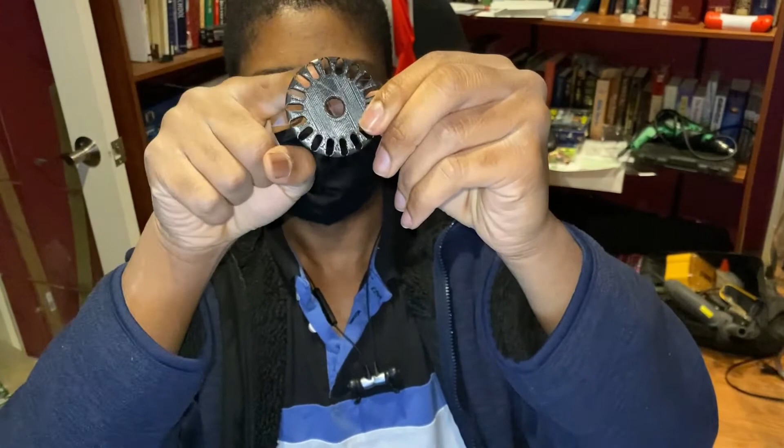And whenever the light passes through one of the holes on the wheel, this is just an example wheel I have, I don't know if you guys can see that, but whenever light would pass through one of the holes, it would increment the value. I'll explain it more in depth when I bring you guys over to the computer screen, but that's the basic idea. That way you can see the position and the velocity of the motor as the motor spins.

And the velocity is just by how long it took for it to pass its original point, because it's done a full rotation by then. So that could be used for conveyor belts or whatever. That way you know exactly where the part is on the line, and you can do some feedback control, because that's the main purpose of it, feedback control systems.

That way you can do some feedback control to actually adjust the belt or the robot, or whatever else you put it on, based on the position that it sees. It knows that it overshot a little bit: oh, wait a second, it's supposed to be 12.2 degrees right now. Mine's not gonna be that good of a resolution, but that's the idea. It's supposed to be 12.2 degrees, but it's 12.8. Let me bring it back to 12.2 real quick. So you use the feedback control, that way it knows it needs to go back and fix it. So that's the general idea.

So I'm going to bring you guys over to the computer screen, show you a little bit of pictures, that way you get a better idea of what I'm talking about. And I'm going to show you what I have drawn up in CAD right now. I'm going to code it using Arduino, 3D print it. We'll get into the whole shebang. So see you guys over in the computer. Let's get it.

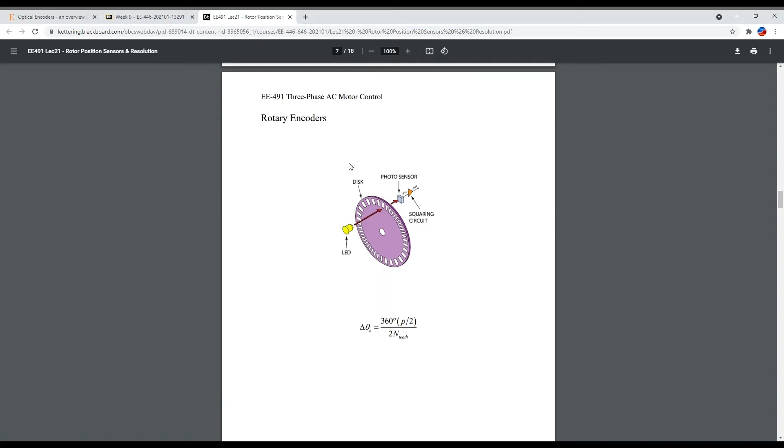Why not? And the thing about quadrature encoders is that you're actually able to tell whether it's going clockwise or counterclockwise, because with just the normal one, all it knows is the amount of degrees. It doesn't know if it's negative or positive degrees, or clockwise or counterclockwise. It just knows, okay, it's been this many degrees. If you went forward and then backwards, it would still increment up because it doesn't know what direction it went. So that's what this is for.

So by having two wheels here, by knowing which series of slots it went through first, the outer or the inner, it can tell whether it's going forward or backwards. So if it goes through the outer one first and then the inner one, it knows that's clockwise, I think, and vice versa for counterclockwise because they're offset. So that's the basic idea of how it works.

So let me bring you into the CAD model I drew for the encoder that I'm going to attempt to build, because the concept, at least to me, doesn't seem that complicated, but it took me a while to do the CAD actually, because, well, you'll see. It doesn't seem that complicated in theory, but I'm a little worried that it won't work.

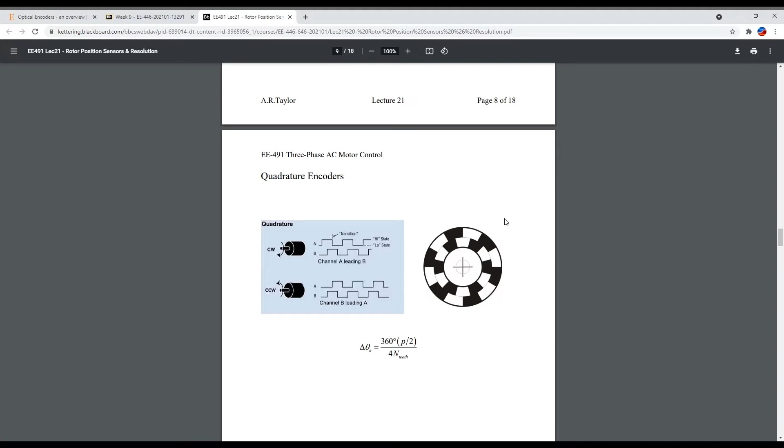But whether it does or doesn't work, guys, we're going to have fun with it. Isn't that what this is all about? We're going to have fun and we're going to learn. I'm sure you've already learned so much just by my amazing explanation.

But let's head on over to the CAD.

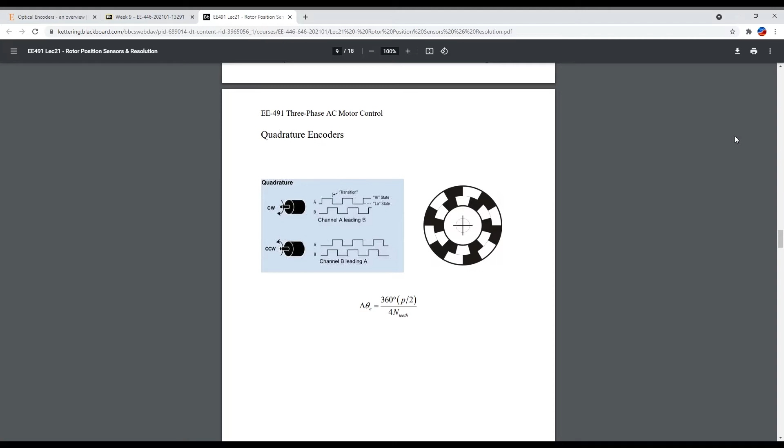I'm not actually going to be using this for any feedback control system to actually adjust the motor based on the whatever and all that crap, which is what you would actually use it for. Right now, I'm just trying to make one that will properly display the degrees. Sending the data over to the motor to get it to actually change based on the amount of degrees that it's going and whether or not you want it to go that far, et cetera, feedback control systems, that's like another video. You feel me?

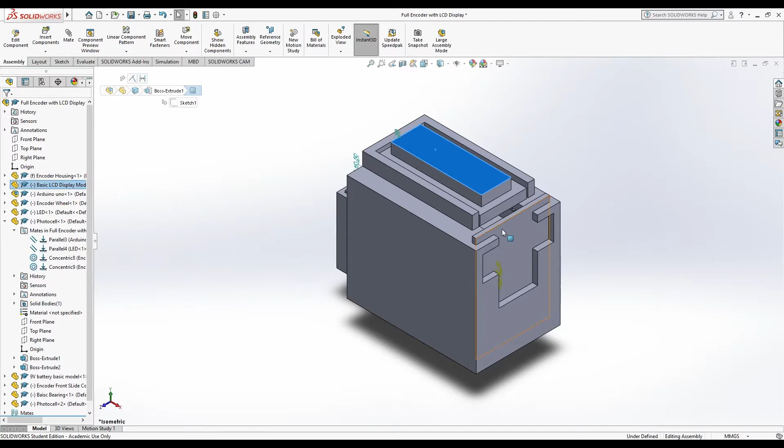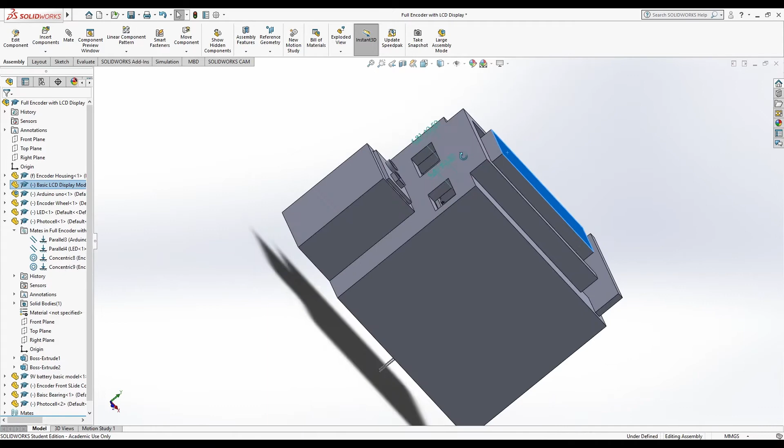So LCD display on top, and I have it just enclosed on all sides. Actually, this goes a little bit higher. That way it won't fall out, right? The only way it could fall out is if you tilted the entire thing upside down. Actually, that might be, it's fine. I don't know if I want to actually make it so that it can't fall out by tilting it upside down. Nah, I'm not too worried about it, because it's going to be attached through wires to the stuff in here. So, eh. Plus, let me see, I actually have it over here. No, I don't really want to glue this thing to it. But that's the LCD display.

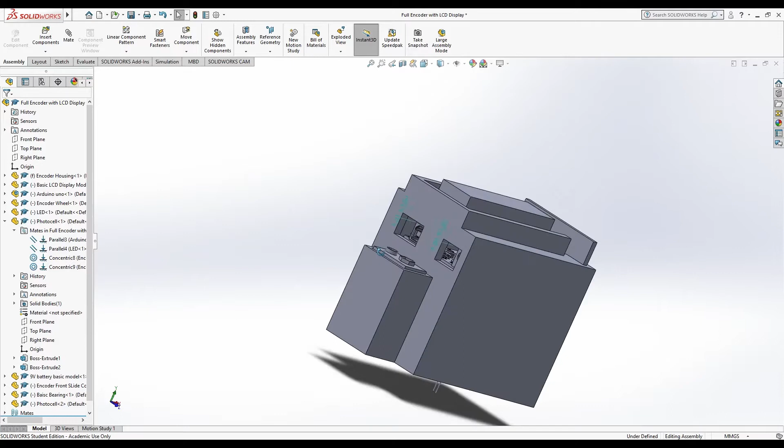And then back here, you can actually see in there a little bit, I got the ports and everything. But back here, I have a battery slot. Oh, that's already fully constrained. But the battery slides in there. It's just a 9-volt battery that should be able to power up everything in regards to the encoder itself. I'd probably use a different battery for the motor, but the motor is completely separate. You slide the motor into the bottom here. So 9-volt battery, so it can connect to the Arduino, which is inside of here.

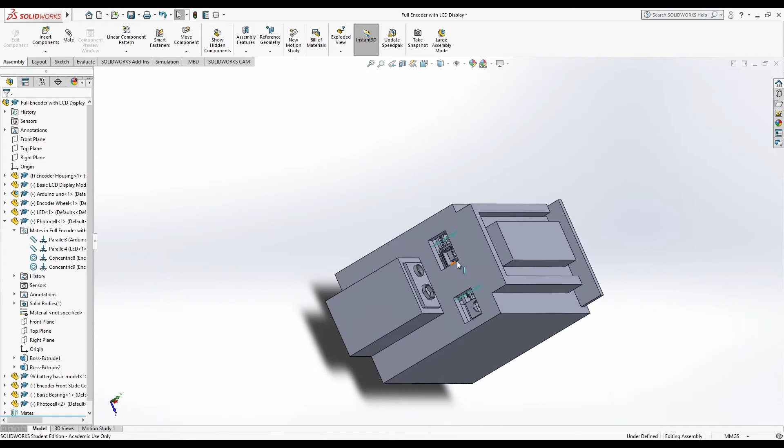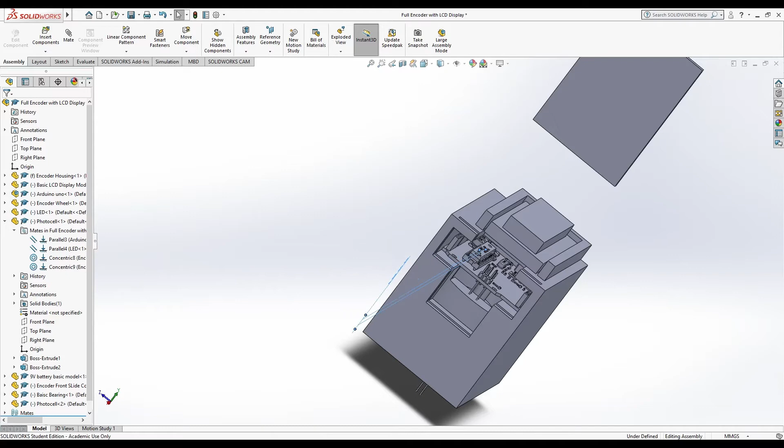And this thing actually slides up right now, because this is how you close everything in. So you can actually slide that right in there. So then wires are going to come from, you see I have a little knockout here. So wires are going to come from this part of the LCD display and go into the Arduino. That way it will actually display the values on the LCD display. And then the Arduino is in here. Whoa, that's a dimension. The Arduino's in here. So as you can see, I created just a spot where you can literally just slide the Arduino in and out.

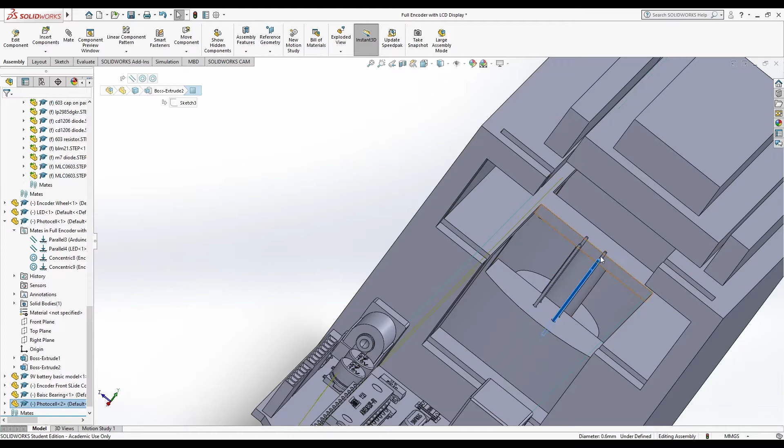And I just kind of have, these are wire leads right here. Yeah, we'll get there in a second. These four little things shooting up, and then this right here. So this entire little H bridge thing is for the Arduino to sit on. So the Arduino sits on this in there, and then it can bring wires down from all the pins over here down into this area over here. Wait, it's starting to get a little messy the way I'm angling this.

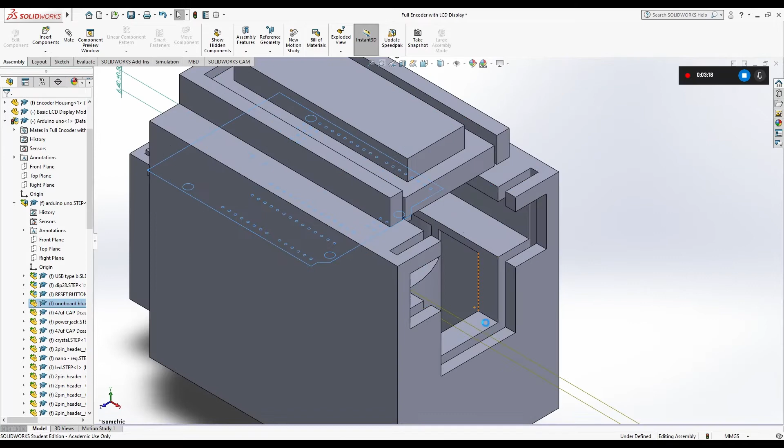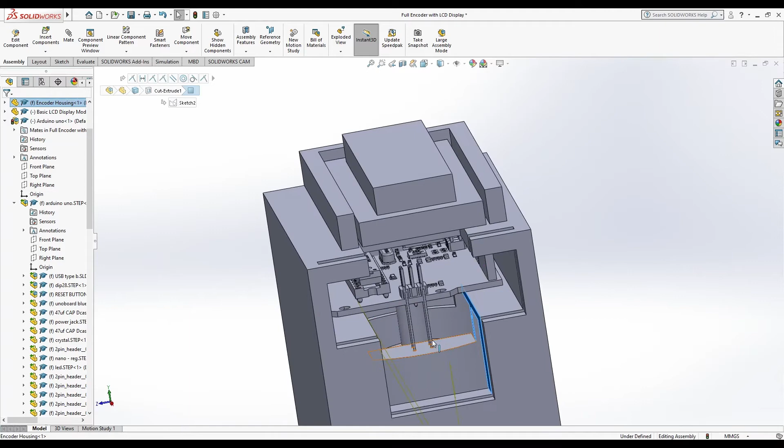But the pins from the Arduino can go down to these leads over here, right? So you can bring the leads in, or actually these are analog, so they go over here, I think. But you can bring the leads over here through this. Again, I have another knockout slot right here. I have this slot right here where it's knocked out from this tube I have down the center. That way you can bring the leads over to the Arduino. And let's see, what else?

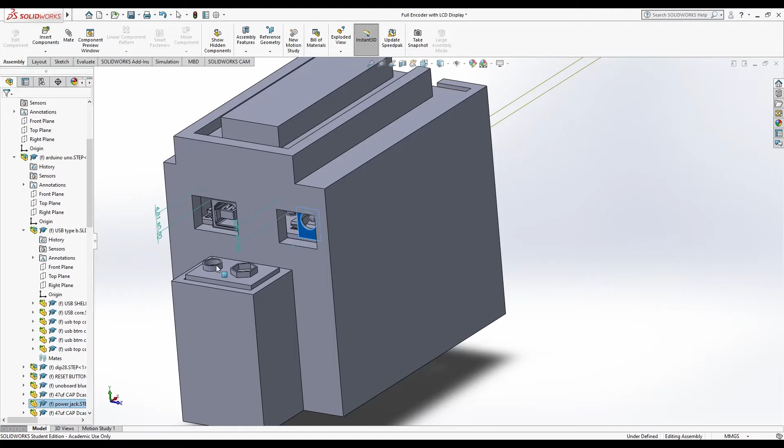And by the way, this is just the ports for the Arduino right here that you kind of saw on the other side that I have knocked out. Oh, I brought that forward a little bit too far. Yeah, about there. Know how I made these holes bigger than they need to be? It's because it didn't really matter, and I was like, yeah, that's good. Give myself some wiggle room. That's not really a critical dimension. But then down here at the bottom, we have our wheel. So let me slide that out actually.

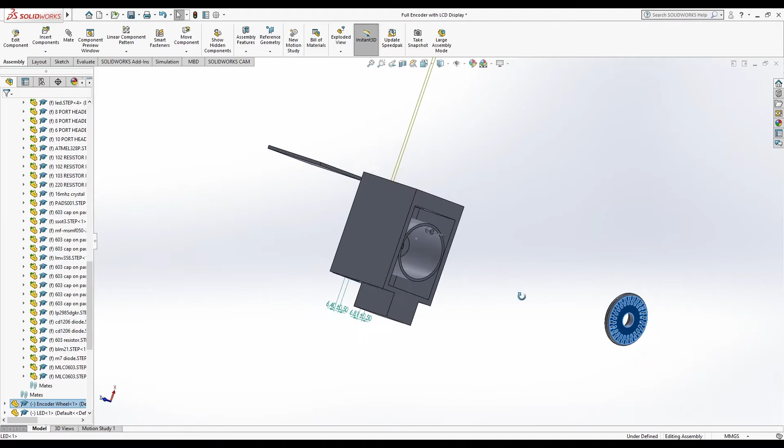Might be a little too far, but there we go. Let me slide that out. So as you can see with our wheel, it has two sets of rings in here for the slots. That's just like in the picture you saw. It has two rings in here. So it's got the outer ring and the inner ring, and by knowing which one it passed through first, it'll be able to tell if it's going clockwise or counterclockwise. You get it.

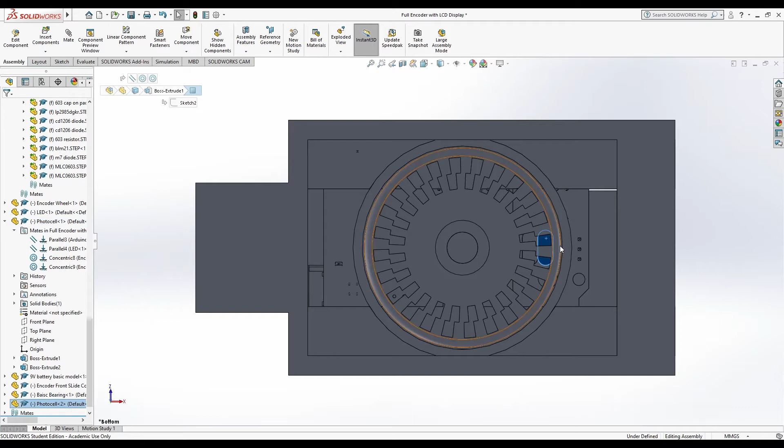And over here, these two things right here are the photocells. As you can see, they're actually a little wide, but they're just barely not too wide, probably. Because like I said, there is a threshold value that I'm going to figure out, and depending on that threshold value, we'll just say whether it's high or low. So when the slot is centered, you see the other ends of the photocell are mostly blocked off by the dead zones in between.

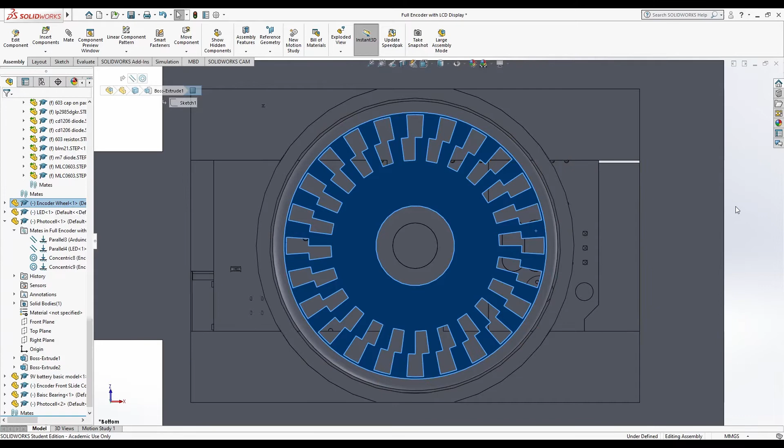So as long as I make sure to say, okay, this threshold value is when it's blocked off on the two sides like that and you're just seeing the center, the threshold value is, I don't know, 155 out of 255 or whatever it's going to be, and that means it's high. So this should work fine. If it was any bigger than that, I might run into issues. And then obviously you have the other one right here. These are aligned with each other, the two photocells, and then the LED would be here as well.

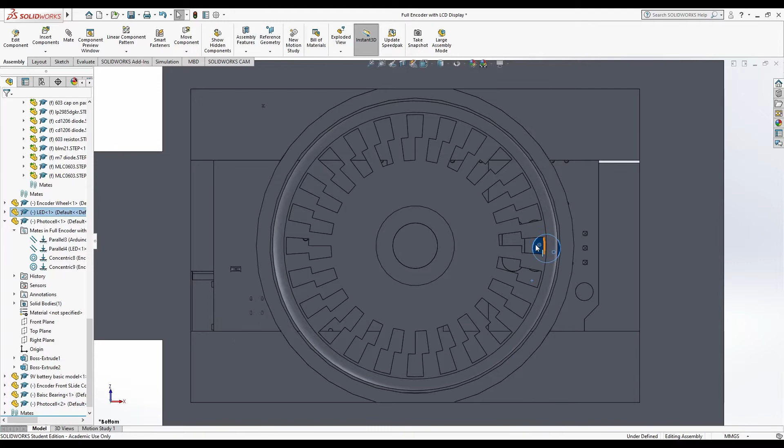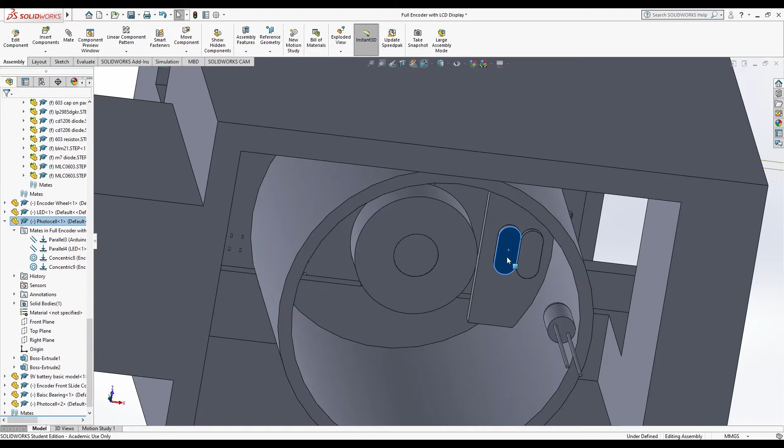Actually, let me bring the LED over a little bit more. So this is the LED right here. The LED would shine onto the photocell, and there would probably be two LEDs. So here's my thought process. I could do one LED, and this one would just have a lower value for what I set the threshold to be for high, and it'll probably work the same. It would be a little bit more finicky, probably, but it would theoretically work the same.

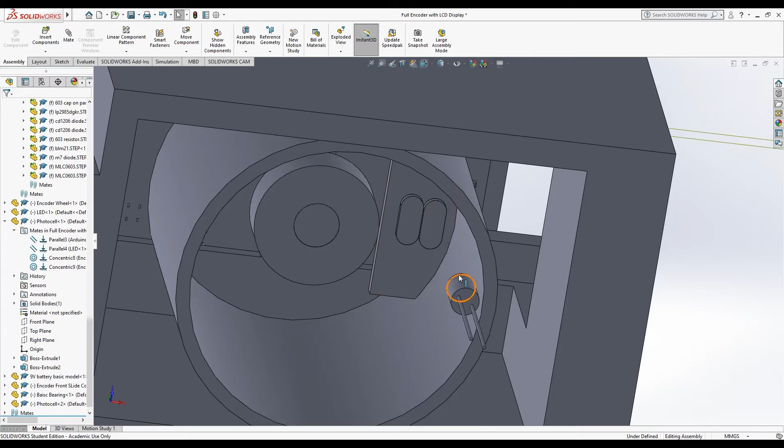But I could just use one LED, and one of them would just have a lower threshold value than the other. So one of them would trigger at a lower light value because the LED is just going to be further away from it. So I might just stick with one LED. Might just be easier that way. Because if I do want to add in the second LED, I need to add one of these. You see this little extrusion here to actually mate the photocells too.

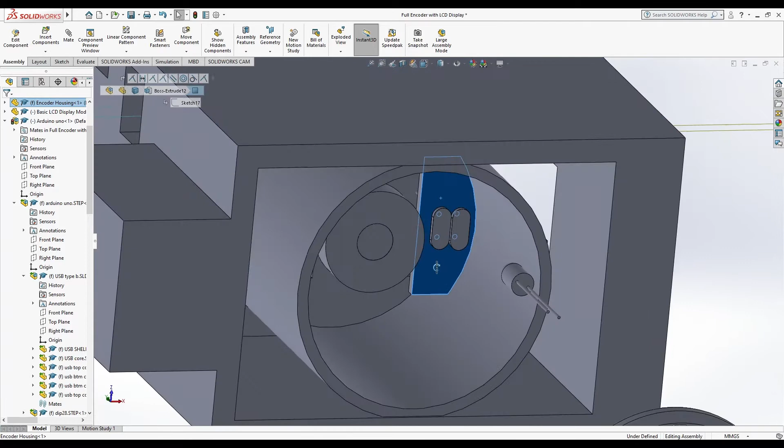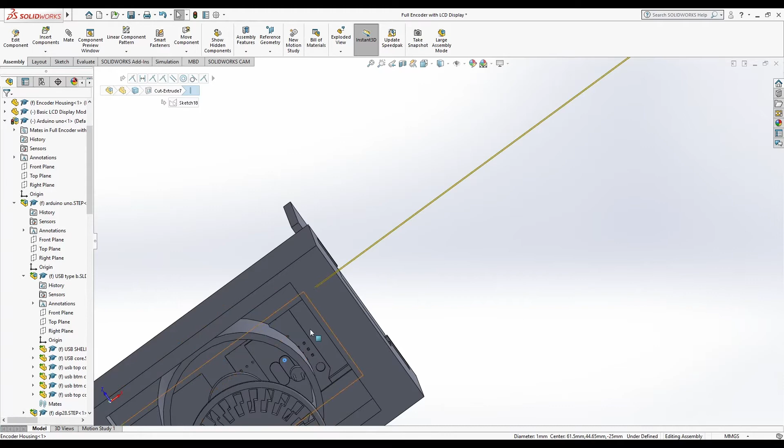So the leads will go through the holes on it over here, and then the leads can come out over here, go around, go into the Arduino. And for the LED, you see how I have this pocket here, just this empty space between the tube inside this box. I bring the leads inside that empty space, bring it up to the Arduino, and same deal. That way I can actually power the LED.

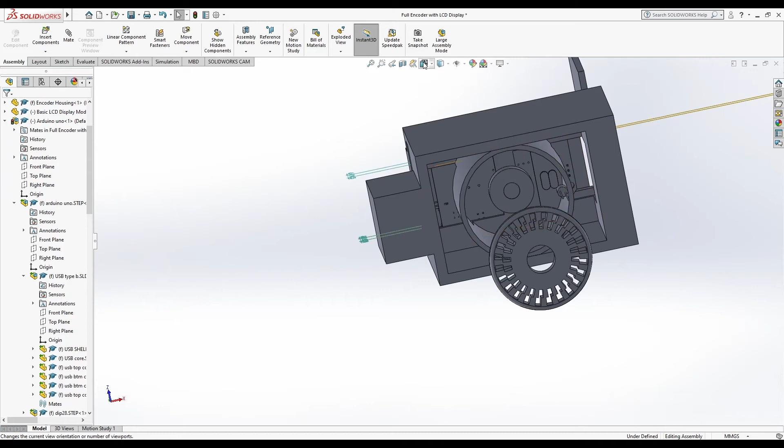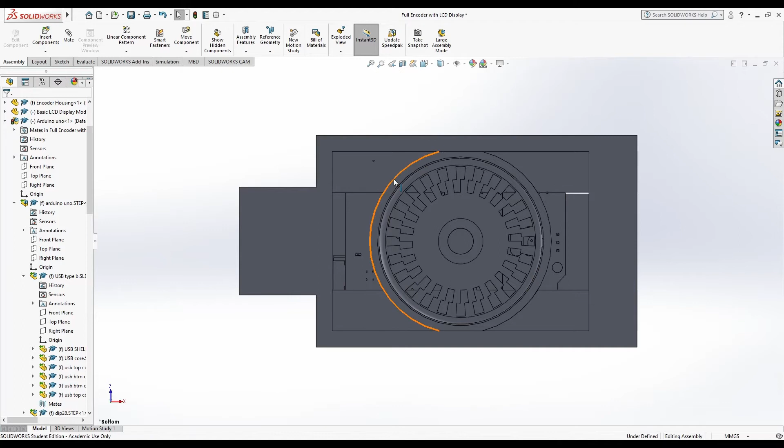And then what else? Oh, by the way, I have the empty space on both sides of the tube. Let me make it a little bit clear. The empty space on this side I'm actually using so I can bring the LCD lead up to the Arduino. This side isn't actually doing anything. I just decided to leave it empty for symmetry and balance and laziness, and that way I use less plastic when I print. You get it.

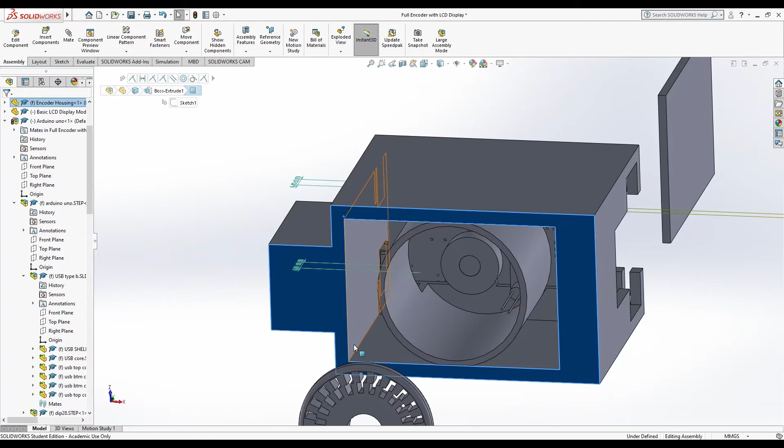I mean, I guess at the least I could have made it flat here. Like, it still could be empty on the inside, but I could have at least made it flat here. I might do that, actually. That is not hard at all. I could at least make it flat here. Like, not open, I mean. So it'll still be hollow in this portion, but at least it won't be open on the bottom.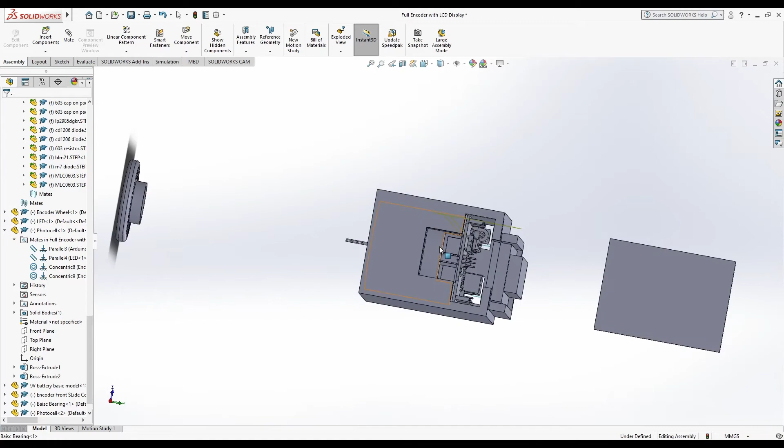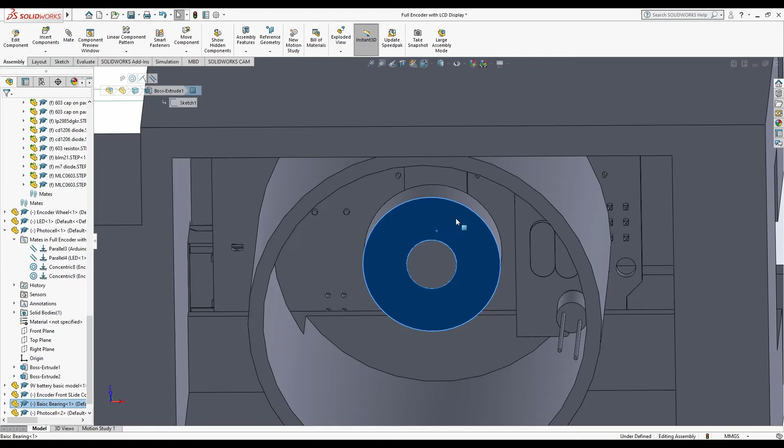And then the last thing that's really worth mentioning here is this right here. So this little circle thing is like a basic drawing that I made of a bearing. So with that bearing, I have a little shaft here that goes from that little H bridge that the Arduino sits on. So it connects directly to that, and it shoots down, and then it mates to this radial bearing. Think like a fidget spinner. So it's one of those little fidget spinner bearings, and it goes to the center of that bearing, and then the outside will be able to spin freely.

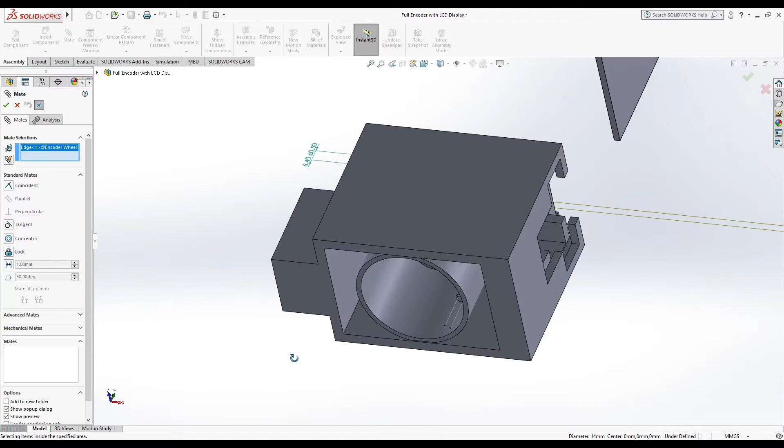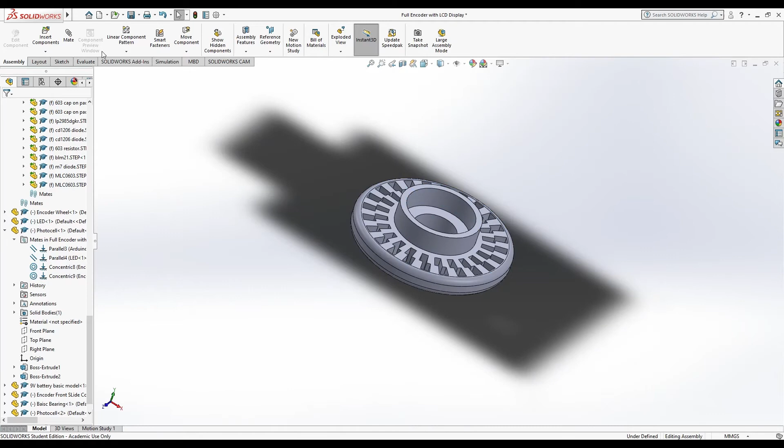So then, when that outside spins freely, I am then able to, let's mate that. Nope, that's the wrong one. Wait. I am then able to, crap, how did I do this? Oh, wait. It's on the top. I forgot this little, so the circle here for this encoder disc is actually smaller than the outer diameter of the bearing. So I made a separate circle on top that is completely connected to the disc here. So then what I can do is mate that to that. And bada bing, bada boom.

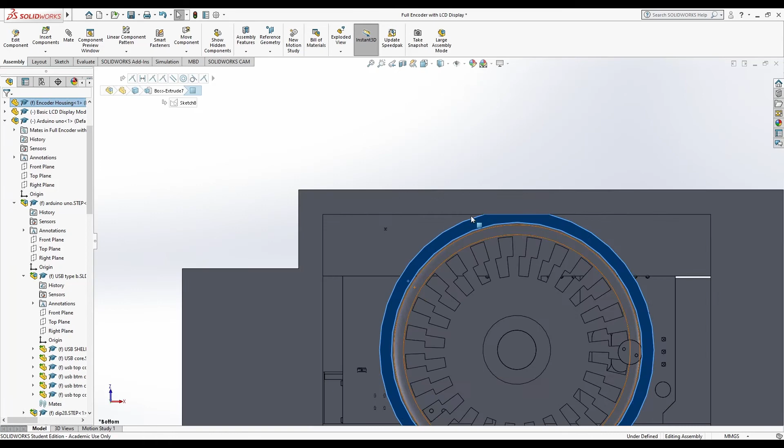So now the encoder disc, you see, it's not touching the edges of the circle that it's in, and it is completely connected to this radial bearing here. Again, like this fidget spinner bearing. So since the radial bearing spins freely, the wheel disc will as well.

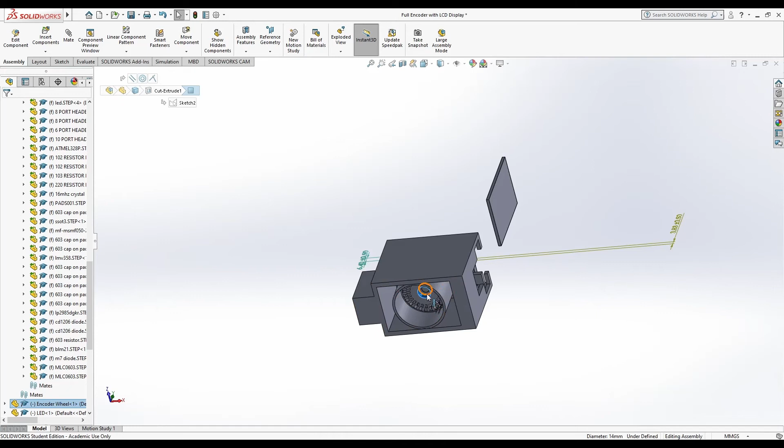So then the motor connects to the smaller circle in this wheel disc, and I actually made this circle bigger than it needs to be, but I can make an easy tubular adapter that will have a bigger hole and a smaller hole on the inside that I can just slide into that hole and then slide the motor into that. That way, even though this is too big, I can put different size motors in it just by using different size adapters. So that's why I made it bigger than it needs to be.

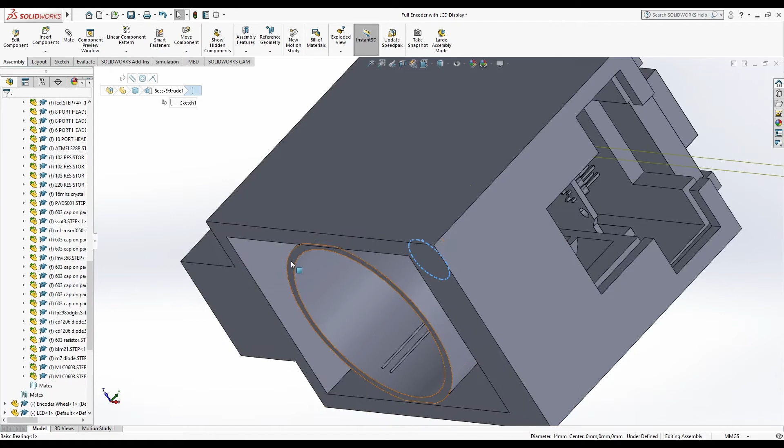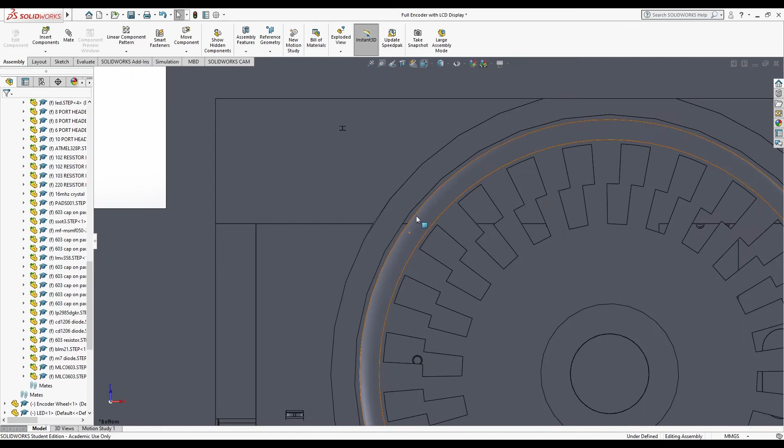But anyway, the motor would then slide up into that with an adapter that would probably be the length to where it gets to the bottom of this. So it would go all the way from in here to the bottom here, and then attach to the motor. And then this disc will be able to spin freely in there without scraping up against the sides. Yeah, that shouldn't touch. I'm just thinking about the detail of the 3D printer, because if it's not detailed enough, it might still end up touching. But I think that should be fine.

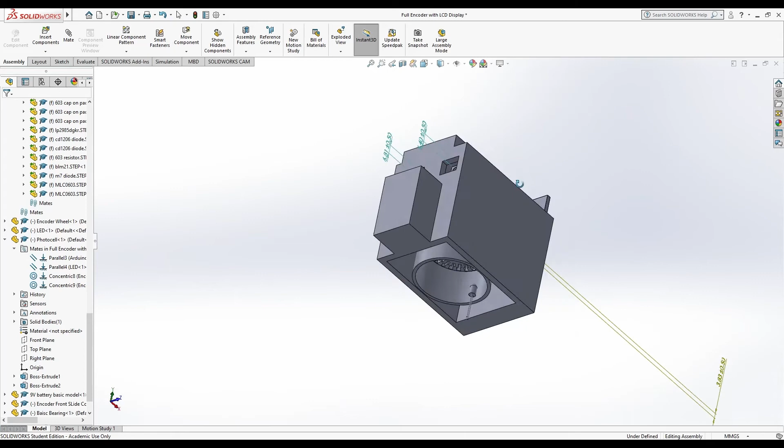So yeah, that's pretty much all there is to it. I say all there is; I just spent like 15 minutes talking about how it works and how I CAD'd it, without actually getting into the build yet. But that's all there is to how it works. So we're going to try to 3D print this whole shebang, put it all together, write some code, do some wiring, and hopefully it'll work. If it doesn't work, I will still end the video, and we will call this a learning experience for everyone involved. So let's get into it.